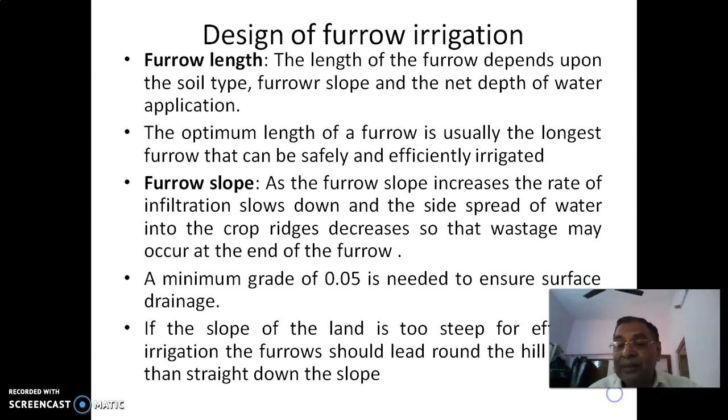Okay, we will continue from the last slide where I stopped in the middle of the design of the furrow irrigation. Let us go again to our PowerPoint presentation. In the design of furrow irrigation, we discussed furrow length, optimum length, furrow slope, and then this also. Then we go to the next one. Design of furrow irrigation, length and other things are over.

Then these are the recommended lengths of furrows in meters. These are all in meters. These are recommended lengths of furrows for different soil types. These are the soil types across. And then for different soil types, furrow lengths, furrow slope, furrow lengths and the depths of irrigation. So that means for a given soil type, for a given slope and for a depth of irrigation. Of course, this depth of irrigation depends upon the crop also, no doubt.

What is the optimum length? This is the design criteria. We can select directly here. This is one such table prepared. What are some of the important points you should learn? As the furrow slope increases across all soil types, right? Furrow slope increases. Definitely your furrow length, irrespective of the irrigation, also gets increased.

For example, you can see in this here, this, for example 300, 350, 370, 390, 380, 270. In this case, here in the clays, it is almost maintaining. It is in fact shorter length actually. So at 0.05 we have the shorter length of the furrow, and as the slope increases, the length of the furrow also gets increased. That is right. Okay. So lengths of the furrows are increasing as the slope increases. Sometimes it is not always uniform. Sometimes it is decreasing also. Here in this case, okay.

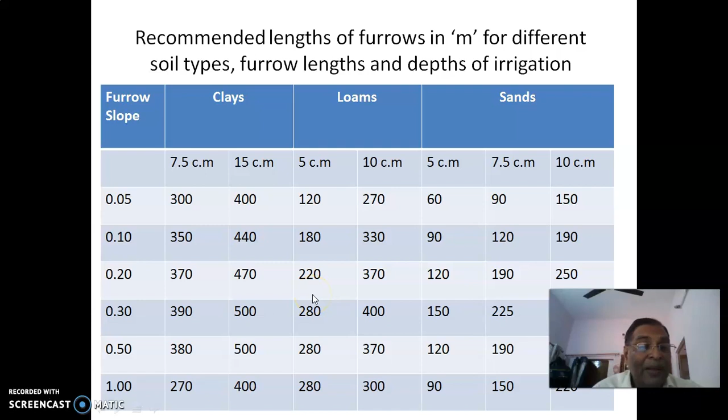Okay. And in the loams also, in fact, for lesser slope, for lesser depth of irrigation, the furrow length is small, and for more slope and more irrigation, the furrow lengths are greater. Same is also like this. So this is a kind of chart you can prepare. It is prepared already, and you can use it. So then, yeah, design of furrow irrigation. Let us go with an example and then equations.

The size of the stream usually varies from 0.5 to 2.5 liters per second in furrow irrigation. The maximum size of irrigation stream that can be used at the start of the irrigation is limited by considerations of erosion in furrows. You may have suitable soils, but you may have other things that you cannot control, like erosion in the furrows. So you cannot have a very big stream. Overtopping of the furrows and prevention of runoff at the downstream, that is another problem. Not only erosion at the upstream end, but at the downstream end you have a lot of runoff. You cannot prevent it because all this water goes and settles at the downstream, particularly at greater slopes. So that is why your stream size is limited.

The maximum non-erosive flow rate in furrows is estimated by the following empirical equation. Okay, what is the equation? Simply, qm is equal to 0.60 divided by S, in which qm is the maximum non-erosive stream in liters per second. It is simply inversely proportional to the slope, expressed as percent. Okay, so you cannot have a bigger stream if the slope is greater. That is the thing. The average depth of water applied during an irrigation can be calculated from the following relationship.

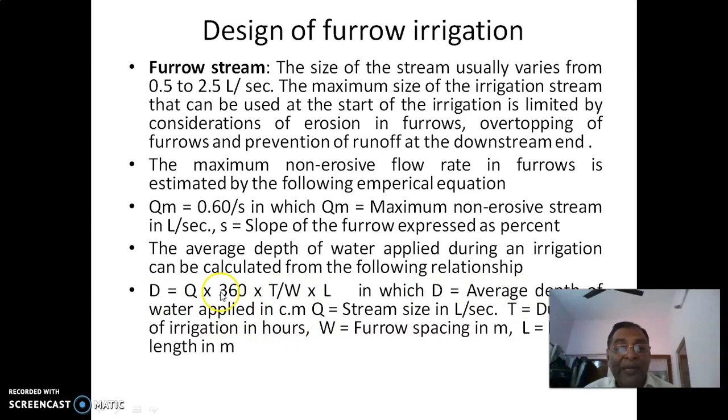This is D is equal to Q into 360 into T, whole divided by W into L. D is the average depth of water applied in centimeters, and Q is the stream size you want to select, in liters per second. T is the duration of irrigation in hours. W is the furrow spacing in meters, L the furrow length. So these are the design parameters that are considered. Ultimately, the average depth of water applied can be given with this equation. Let us take an example. In this example, a furrow is 100 meters long and spaced about 50 centimeters apart, irrigated by an initial furrow stream of 2 liters per second.

Then the initial furrow stream reached the lower end of the field in 60 minutes. Okay. Then the size of the stream was reduced and made 0.5 liters per second. When it is reduced, it is called the cutback stream. It is continued for 1 hour. So estimate the average depth of the irrigation.

Here there are two stream sizes. In the first stream, average depth of irrigation by initial furrow stream. That is, D is equal to, by the formula already discussed, we simply substitute these values and got 14.4 centimeters. This is 0.5 Q into 360 into T divided by W into L. 2 is the stream in liters per second, and 60 the time in minutes.

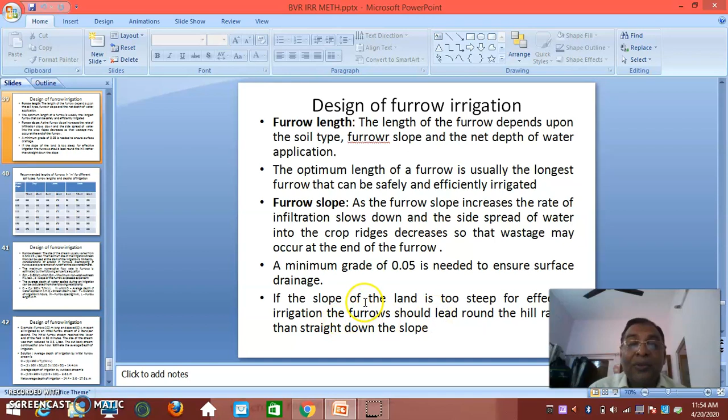So many minutes, and we go there. Yeah, so you can substitute here properly for the first stream. Then after this stream it is reduced. Again the same formula, you just substitute, you'll get 3.6 centimeters. So net average depth of irrigation is depth due to the first stream and depth due to the second stream. So combined that will be 17.6 centimeters.

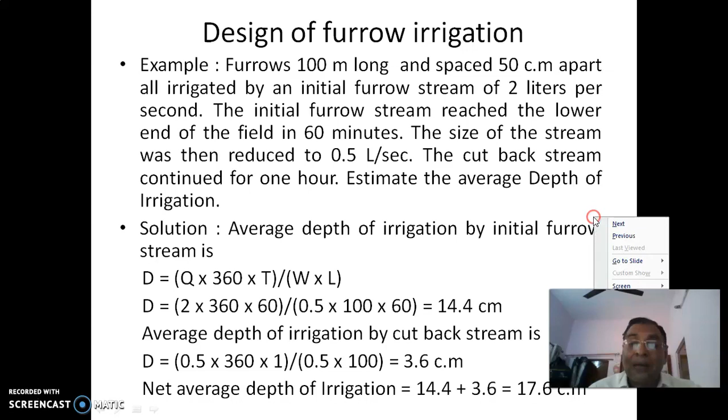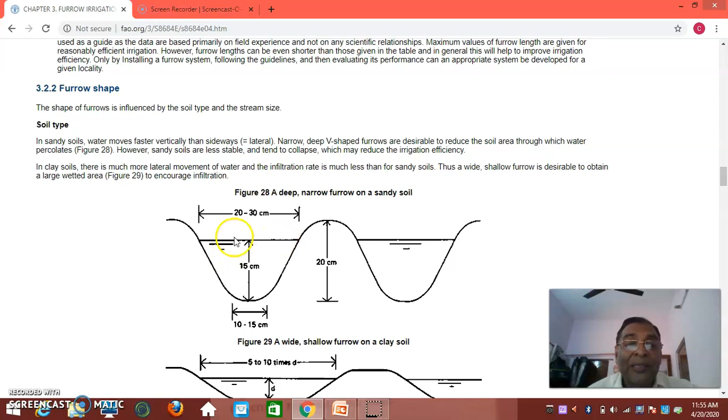Now, before we finish, we will also go back to our FAO documents discussion. We will go there. Just for shape, you can see these are the deep furrows, 20 to 30 centimeters, 15 centimeters the height. These are for your idea I am showing. And this is somewhat wider and shallow. This is a base of 15 to 25, but top is 5 to 10 times D. Okay.

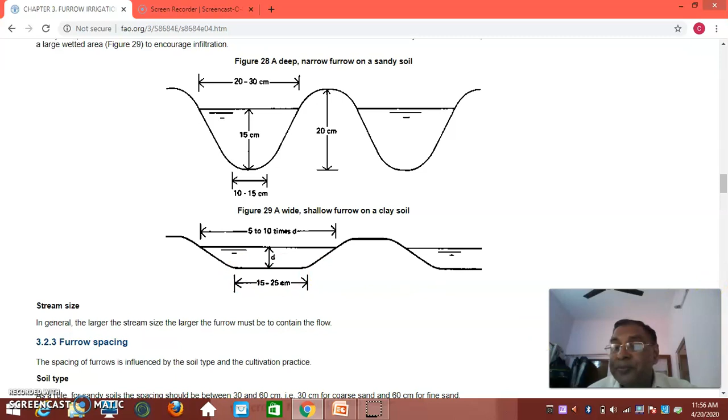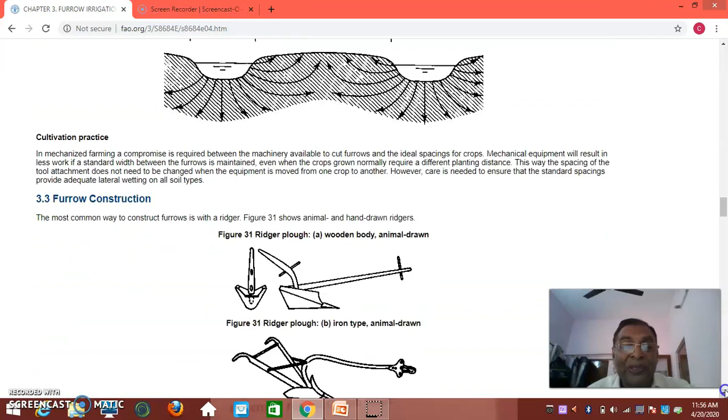This is a double ridged furrow. If the soil is very encouraging, you can have a double ridge. That means by capillary action, the water you can get here. So that type of furrow system also you can have. Of course, these are all implements. I don't want to spend time here, but I want to spend time on this one, wetting patterns.

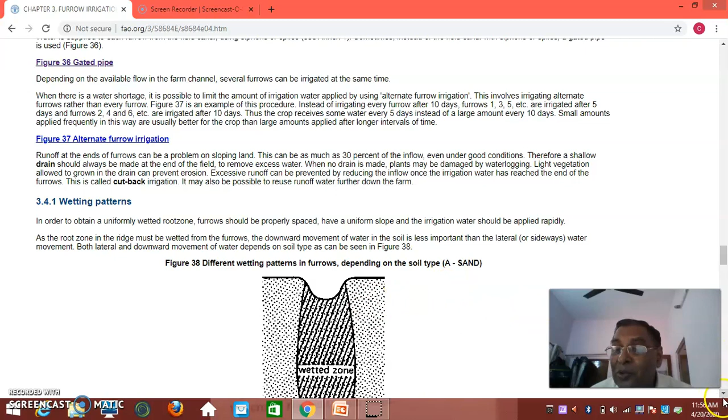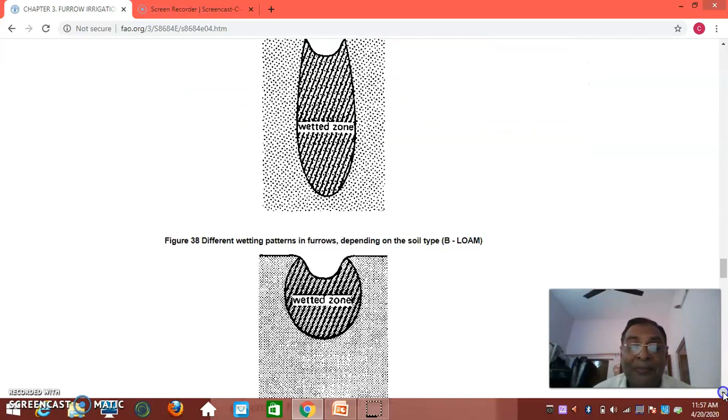This is very important because in the furrow method, the most important thing you should consider is wetting patterns. Different wetting patterns in furrows depend on the soil types. For example, take the sand here, it is going deep, not sideways. So you cannot have wide ridges; sharp ridges you should have in this case. As the soil texture changes to loam, you can see almost a ball-like shape. So you can have reasonably wide ridges in the case of loamy soils.

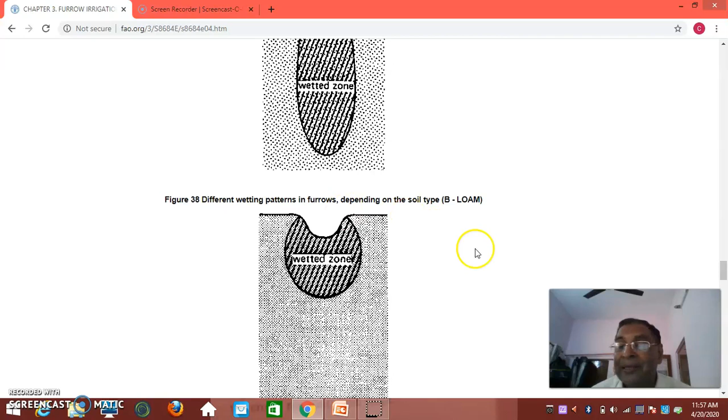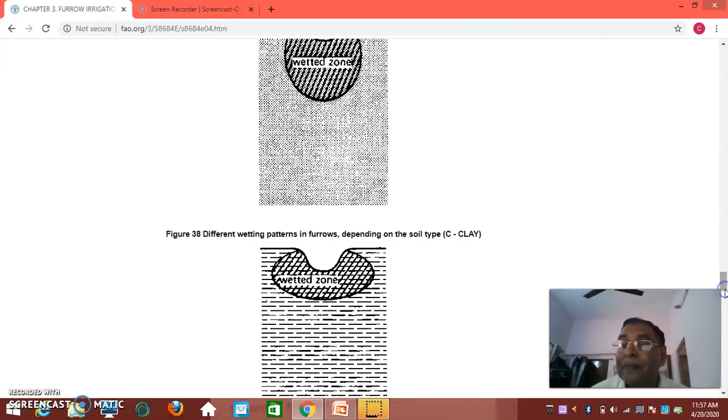Similarly, if it is clayey soil, the wetted zone increases further. So somewhat overlapping is also there from the side furrow. So that also, you can say, double ridged things you can put. Like this you can have other things also. What is this? Ideal wetting pattern. A small overlap should be there so that there is more watering to the plants, and maximum moisture you can utilize from both sides.

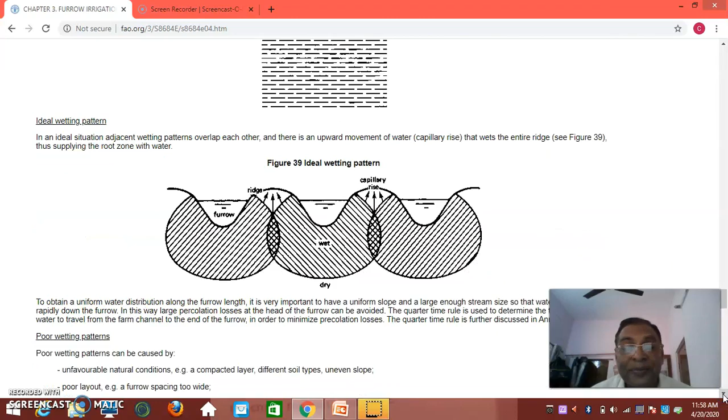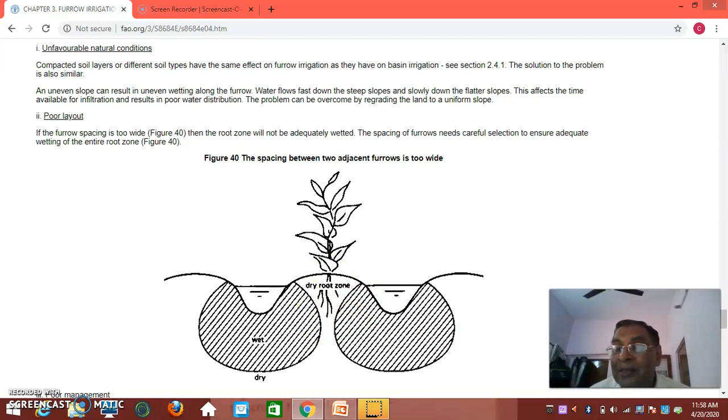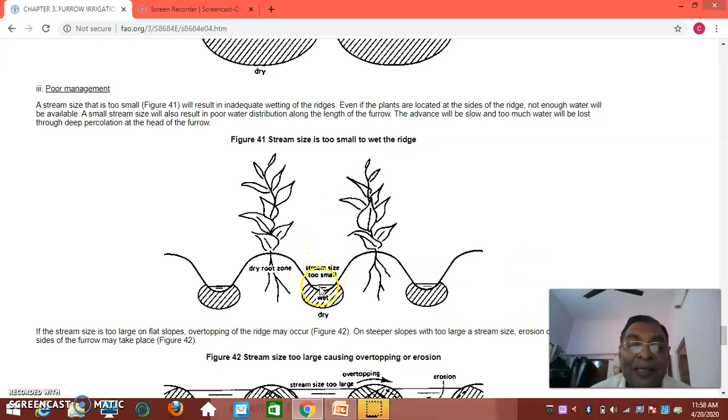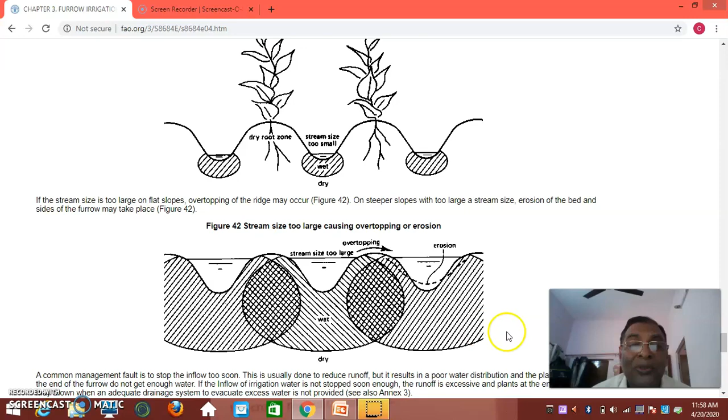Stream size is too small to wet the ridge. You have to increase the stream size in this case. Then stream size too large: almost overtopping is there, so unnecessarily there is wastage of water. Okay.

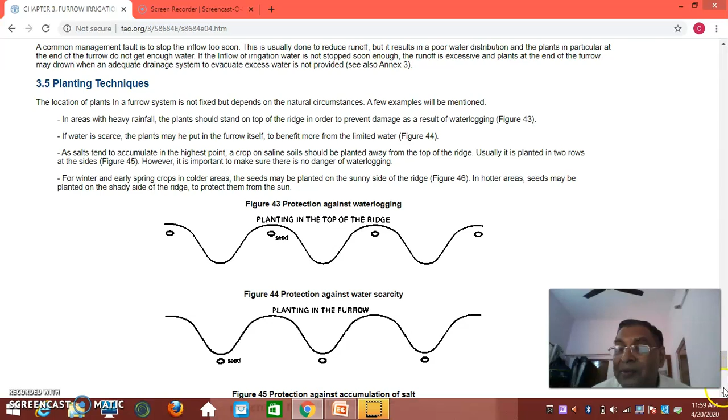Protection against waterlogging. For example, if you feel the soil has waterlogging conditions, you can put the seed here, at the middle of the ridge on the top. Suppose in sandy soils there is a problem of water scarcity; the seed can be put in the middle of the furrow. So you can meet the water requirements of the plant as per the soil characteristics. See, planting on the side of the ridge.